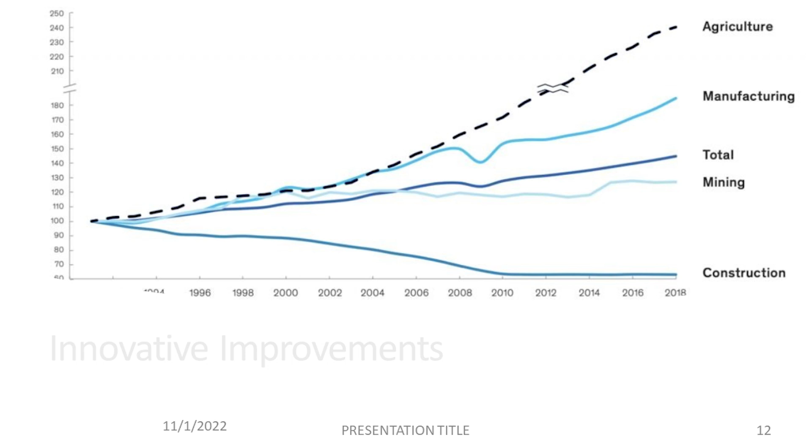Of course, this concerned some people, so they studied why this was happening, and the reason was lower margins. Lower margins do not promote innovation, but industries with higher margins had a bigger incentive to put more money into innovation to get things done quicker. So what does this mean for the bottom line? It affects how productive a labor force can be in a given industry.

This minimal jump is also compounded with the labor shortage we're all experiencing in one way or another. So even with a surplus of available construction jobs, the construction industry doesn't seem to be getting the best bang for its buck. Of course, there's a lot of factors for this, considering there tends to be a lot of downtime in our industry, such as mobilization, lane closures, cure time, repeat repairs, or even lack of automation compared to other industries like manufacturing. But finding ways to improve productivity per hour worked is something innovation can certainly help with.

So it's a little bit of a shameless plug. When I first saw this, I actually stole it from Mario from Alchemco, but I thought about concrete repair. One thing we always preach at Phoscrete is the speed at which you can get repairs done, either allowing you to get more work done in a given lane closure, or even allowing you to get off the road quicker rather than waiting for concrete to cure. But that's just one small example of how we can improve the productivity of labor hours.

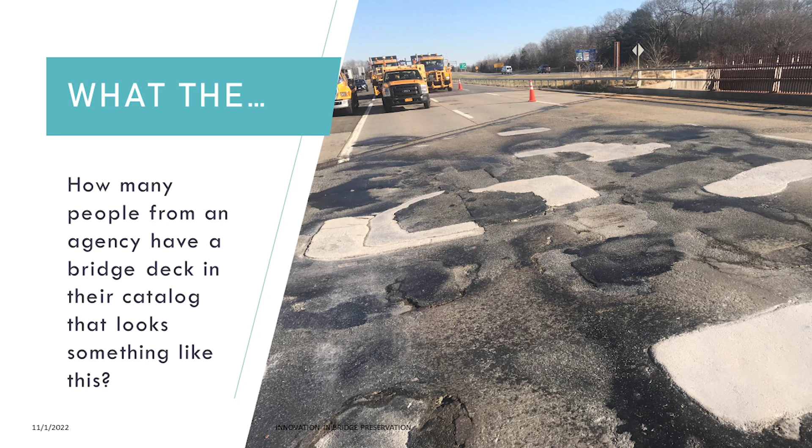And just so you know, this is not from any states in this region. But anyway, this doesn't look good for the public, and it seems like very little is learned from patching this bridge deck because the DOT has no idea what products are working or not working. This is what we're trying to avoid, or at the very least, learn from a faster path to the best solutions. So this is basically the problem statement of ITD.

I realize you can all read it, but I'm going to read it anyway because I think it's worth stating here. So, a faster path to the best solutions.

Because of all the complexities and risks involved with bringing new products and services into acceptance and use by states, ITD offers a faster path to demonstrate, observe, document, and share both successes and failures of innovative technologies. ITD helps industry speed up the best solutions to market and saves agencies the cost of wasted time and resources on unsuccessful technologies. So we're trying to make sure that everything we have is vetted, and we show the good, the bad, and the ugly.

That way you know that the data you're seeing is not a case study. Typically a manufacturer using a case study is only going to use the best ones. But this promotes the performance and how it's installed from an independent perspective. It's not me saying it's the best thing since sliced bread.

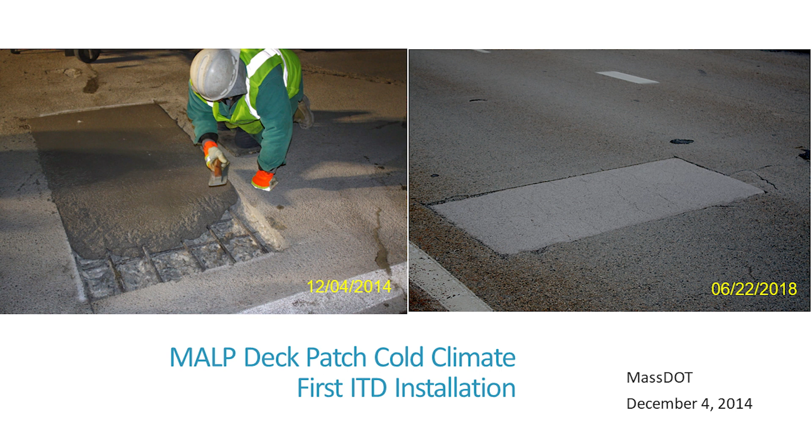I believe this is a 30-day inspection of that install. Another potential disruptive innovation is that Phoscrete has the ability to work in sub-freezing temperatures without sacrificing quality of repair or extending lane closure times. The MALP formulation of our material, magnesium aluminum liquid phosphate, has a liquid activator with a negative 20-degree freezing point. This install was done with Massachusetts back in 2014 in 30-degree weather, and the picture on the right is the 4-year inspection, so it's still looking strong.

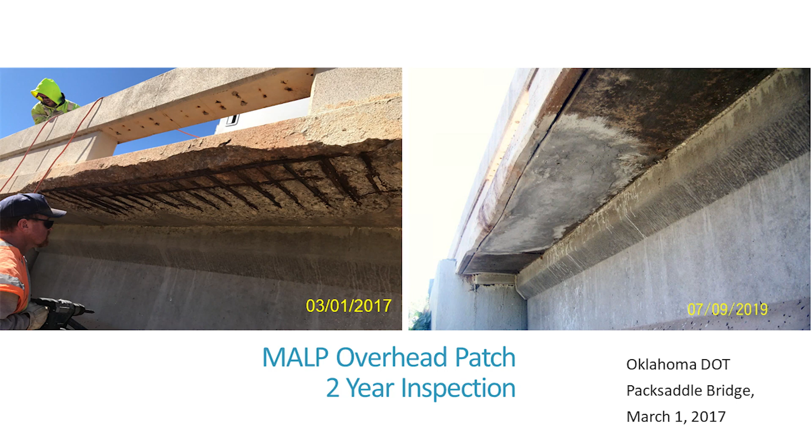Another potential disruptive innovation is that Phoscrete stops corrosion on contact with rebar without needing to sandblast or treat it. This was done in Oklahoma on the Packsaddle Bridge under Walt Peters, who's here in the audience. We monitored this, using 47 pails of Phoscrete VO. There's no sandblasting involved; the Oklahoma DOT maintenance crew performed the installation. We've been monitoring it ever since it was done in 2017, and we've been back even since before 2019.

So it's still performing well and still bonded. There's no evidence of rust or corrosion, but some small hairline cracking was recently observed. Again, we want to promote everything, both the good, the bad, and the ugly, but it still seems to be performing very well.

Next up is PoreShield, a soybean oil-based treatment that fills the concrete pore structure to make it hydrophobic and protects the concrete for at least 10 years. The potential incremental innovation here is that it's an environmentally safe, non-hazardous material that's easy to apply to improve concrete durability without negatively affecting the concrete in any way.

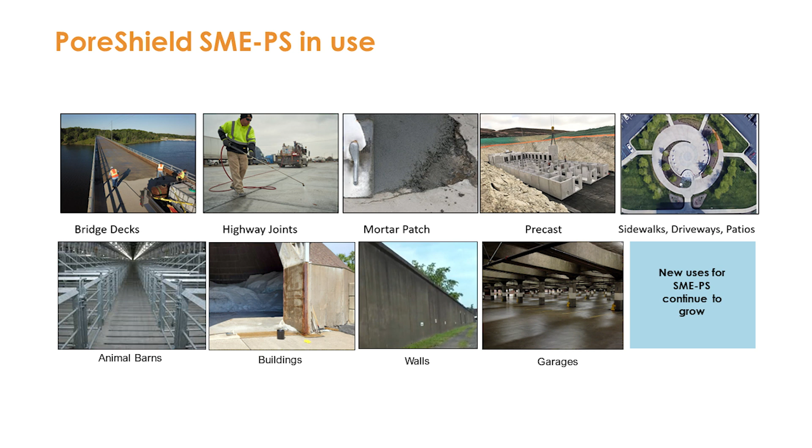Again, we continue to learn about these technologies. Beyond pavement joints and bridge decks, salt storage buildings have been identified as an aggressive environment for concrete, where PoreShield offers a significant extension of service life at minimal cost.

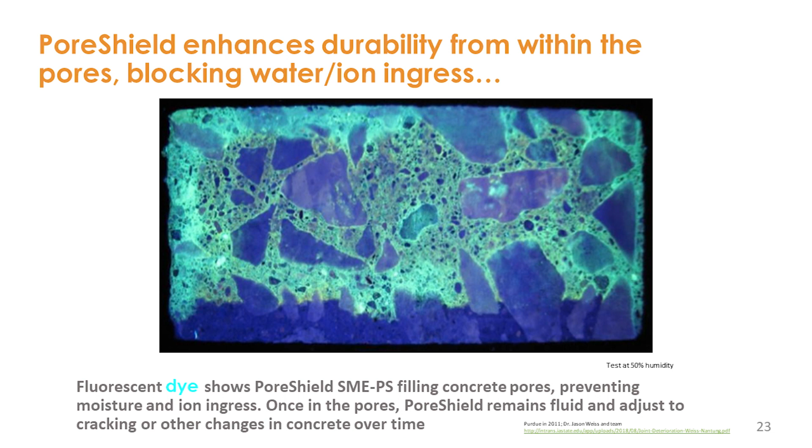The potential breakthrough innovation here is that PoreShield is not a sealant or a coating; it works below the surface. Instead of coating the surface, PoreShield fills the concrete's pores with a viscous hydrophobic material, leaving no film on the surface. PoreShield has lower surface tension than water, combined with higher viscosity, allowing it to make its way into the pores ahead of water, which significantly improves freeze-thaw and salt scaling resistance. You can see the fluorescent dye in the pore network, going about an inch deep, and again it doesn't stay on the surface, it absorbs in, there's no reaction.

One of the cool things that came up with ITD, and we're always trying to improve our products and methods, is that when PoreShield presented on durability capabilities, Phoscrete was trying to find ways to improve salt scaling durability over time, especially in harsh climates like Minnesota, Maine, and freeze-thaw cycles here in Kentucky. We tested PoreShield as the admixture to Phoscrete.

We were surprised to learn that adding the soybean oil component did not impact bond or compressive strength, and it reduced our already low shrinkage numbers, and it also made it a little easier to work with. So we found over the years that it's been really improving our salt scaling and freeze-thaw cycles, adding life to the surface repairs.

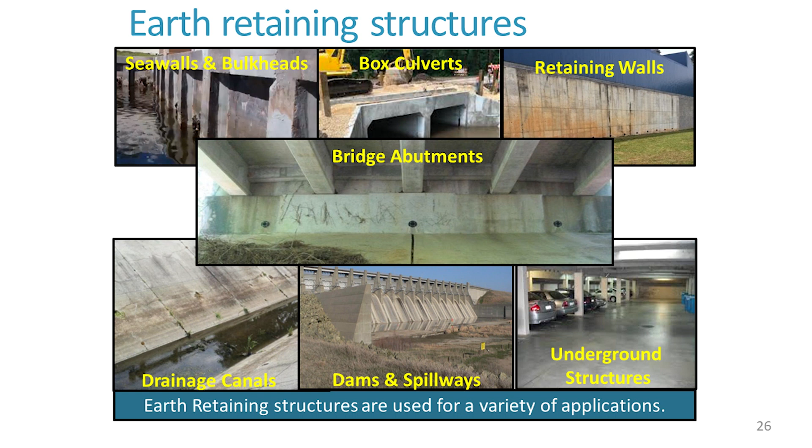Next up is Jet Filter, which has an innovative solution to keep weep holes from clogging. Traditional behind-the-wall drainage systems fail over time due to geotextile clogging, which increases hydrostatic pressure, or tearing that allows backfill or soil leaching. Drainage failure results in deterioration of earth retaining structures, and repair costs can be prohibitive. So Jet Filter incrementally improved on this approach with internal improvements and unique application requests folded into the product line: prevents backflow, optional geotextiles, extended drainage path, and vermin control.

The breakthrough innovation this led to is it extended structure service life with a serviceable weep hole. It quickly and inexpensively preserves existing infrastructure by restoring failed drainage systems. Serviceability ensures drainage systems perform at peak output. The maintainable weep hole products also provide primary drainage for new or replacement retaining structures. After this installation, the water table in the backfill lowered to the level the Jet Filters were installed. This reduced leaching, resulting in drying walls and ceilings in just a few days.

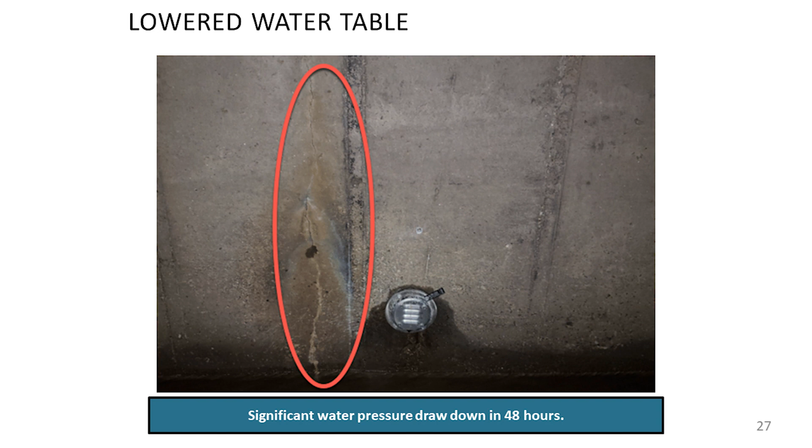Next up is TrueTech Bridge, which has an innovative ClearCast product - ClearCast forms for concrete placement. This is pretty interesting: the product here is transparent stay-in-place forms. This has all the construction benefits associated with SIP forms, speed and safety, but with the added ability to inspect the deck for maintenance preservation over time, which allows owners to get the most out of their investment.

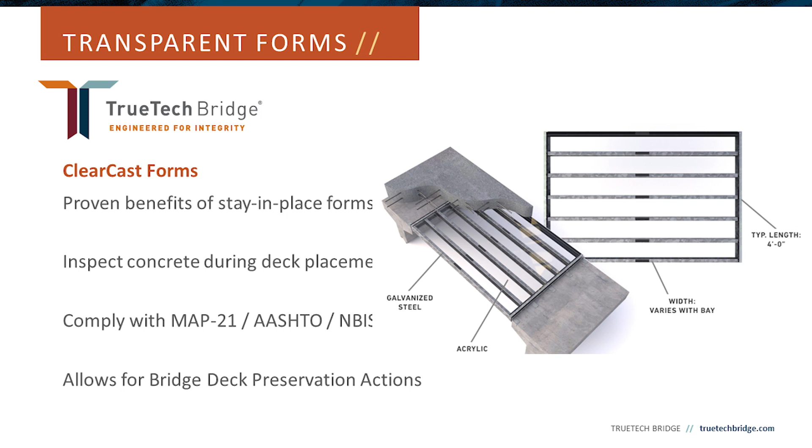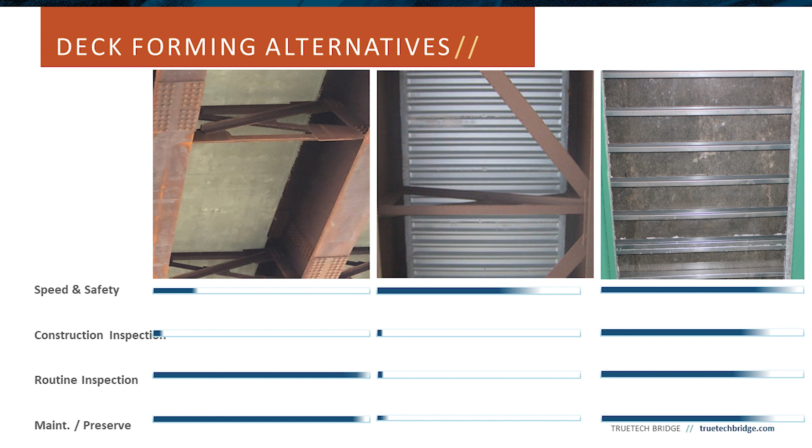The next product they have is a transparent protective shield and false decking. This is another incremental improvement or innovation. This has reduced the risk to people and property, as well as inspectors, through the use of transparent false decking. As a cost-effective alternative to lumber or metal mesh panels, transparent panels require less labor on site. They do not rot or deteriorate in the bridge environment, and they allow owners to scope out the deck from below, identifying any risks to the public. You can inspect about 75% of the deck underside without removing those panels.

I think we have two more here. The next one is advanced chemical technologies, the use of silanes. This is the deck seal system. The potential breakthrough innovation is that this is a system using two compatible technologies to extend the service life of bridge decks.

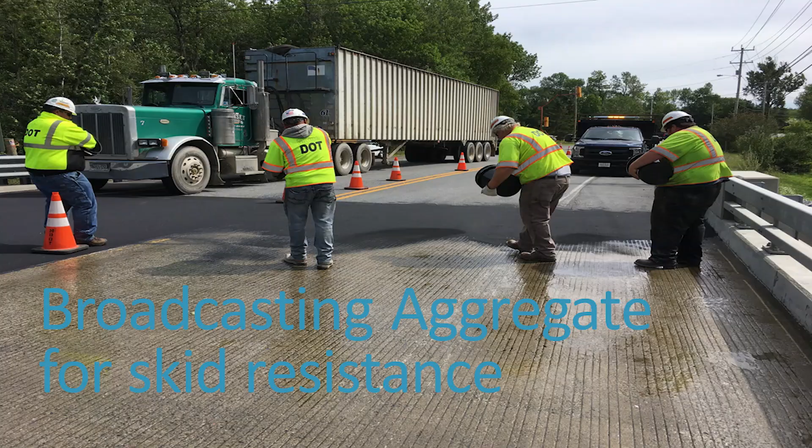A silane application followed by a compatible epoxy healer sealer waterproofs and fills cracks with a single lane closure. This combination promotes the depth of penetration in the silane of upwards of 3/4 of an inch, which will protect the rebar for years. Independent testing proves that this combination outperforms either system by themselves. Another incremental innovation they did here is actually broadcasting sand or aggregate, which helps skid resistance and opens up the traffic even sooner.

Last but not least is Alchemco, which is demonstrating an innovative product that protects concrete by forming a gel inside the concrete matrix. Their booth is actually right next to mine where the caveman is, so feel free to come say hi to Mario.

The Bridge Deck product line offers three different unique spray-applied waterproofing systems, protecting bridges for up to 25 years before reapplication is required. So the potential breakthrough innovation here is that it's fast and easy application, which equates to very short lane closure times because it dries within hours.

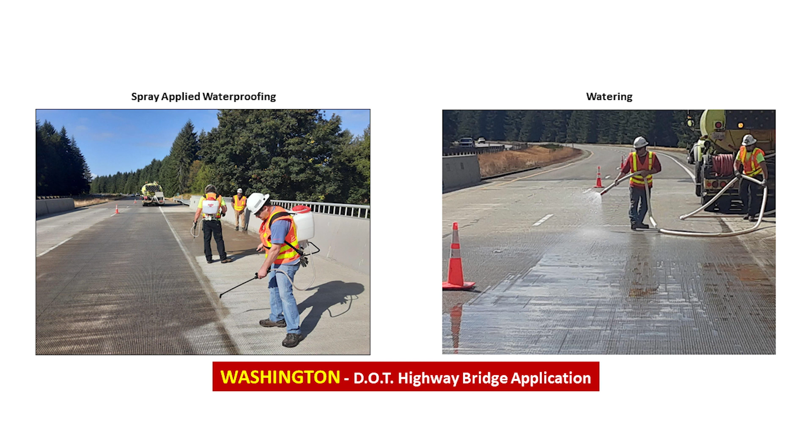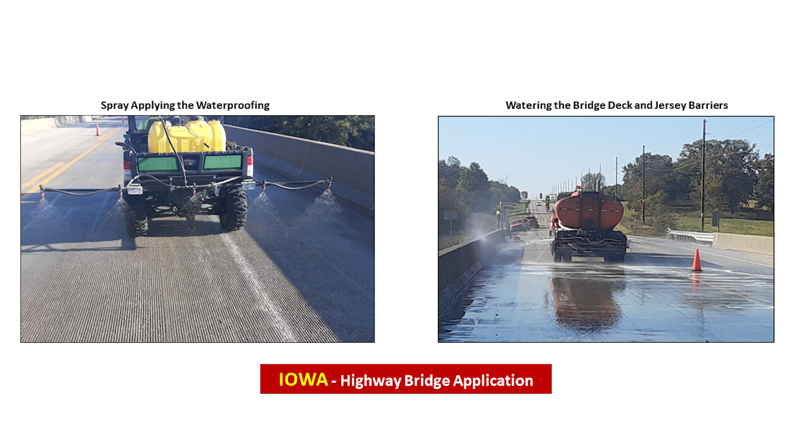The potable water certification means it's environmentally safe and contains no VOCs, and can be applied by either trained contractors or maintenance personnel. A potential incremental innovation here is that it's a cost-effective long-term method for waterproofing, protecting bridges and structures for decades, not just years. There's a 45-year global track record, and the subsurface gel forming technology cannot deteriorate, wear off, or be physically damaged because it works inside the concrete. They have a menu of waterproofing systems that fit any budget requirements while providing a single source responsibility.